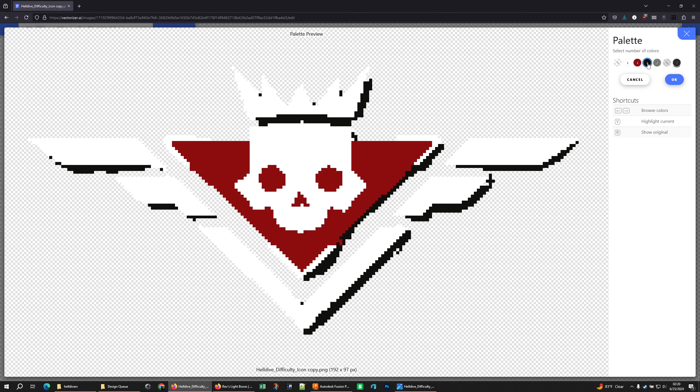So instead of having multiple layers that it tries to cut down, you have fewer layers. Your printer, let's say you have a Bambu X1/P1 series, you've got 16 shades to work with. You can use more advanced techniques like layer blending or different thicknesses for different lighting effects, all valid ways of doing this, but we're trying to go simple.

So I'm just going to tell it to use 4 colors: black, white, red, and transparent. You always have the first one as transparent. So we do that again, and now we don't have all those grays in here. That should make this a little bit easier to work with.

There are a couple of different recommended settings. Some people like to work with fill shapes, I don't — I'll explain why in a minute. I prefer to use stroke the edges between shapes. Off the default settings, I prefer to turn off the circular arcs and elliptical arcs. This is actually something Pete worked on with the folks at Vectorizer specifically for creating light boxes, and they said this will improve your experience. So my suggestions again: stroke the edges between shapes, turn off the two different arcs, and when you switch from fill shapes to stroke the edges, some other settings change, like you can no longer choose filling gaps. This is what I recommend.

So I'm going to grab this and just overwrite one of the ones I was playing with earlier, and jump into Fusion. In Fusion, I have a couple of recommendations for you.

First of all, create a template file — this will make your life so much easier. This one's mine, my Lightbox source. I'm just going to make a copy of it real quick. I'm going to rename that copy, because this is going to be the Helldivers box. Mark that as editable because I am not paying for Fusion — the free demo works fine for me.

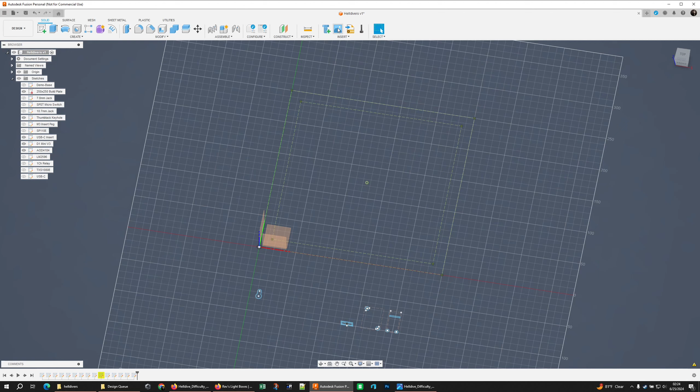So anyways, what can we do in Fusion? Well, there's a couple things. First of all, something I think a lot of people overlook is canvases. If you go to insert, canvas, or in my case I've got it pinned up here, canvases are super cool. So I'm going to start a new sketch real quick, and I'm going to add a canvas.

What the canvases let you do is you can take a raster image - oh, it's not going to go to the canvas, sorry about that - you can take that raster image, that JPEG, that PNG, that bitmap, whatever, and literally just drop it in as a background. You may be wondering, well, what's the purpose in that? What's the use in that? If nothing else, now I have a visual reference of what I'm recreating. But you can also use this for tracing, to recreate things just by drawing lines on top of them. It's a really cool little technique.

So I'm just going to drop this in here, and I'm not going to bother scaling it right now. I'm not really that worried about it, just kind of showing what it does. This is something that you don't really get to interact with. It's there, but you can't do anything with it.

Where you insert it in your timeline matters. I created my sketch before I did this, so now it's not going to show up. If I move that canvas back one, to where my sketch was created after this, now when I go in and edit my sketch, I can still see it. This is pretty cool because now I can come in here and draw my circles to try and recreate components of it or whatever I may need to do. Very, very useful thing, especially if you're recreating logos or things like that, where you want to have that visual reference, maybe for tracing dimensions of things or whatever.

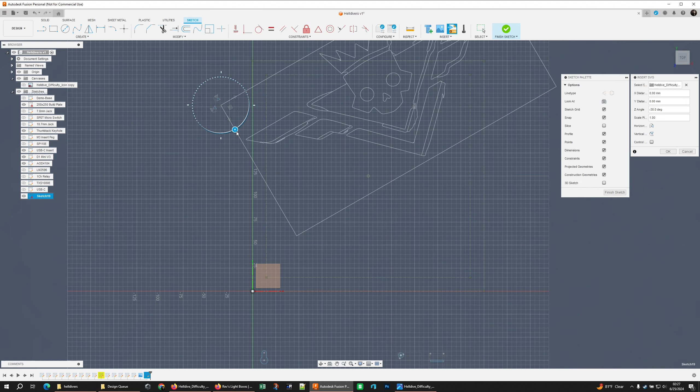What I'm going to do is just kind of scale this out first. Let's bring it up - I don't know, right about there maybe. It's probably too big, but that's fine. I guarantee that's too big. Let's rotate this 45 degrees, try and put that back in the middle. No, maybe it's not - I might have gotten that just right. So I've got my corners are inside of my safe zone. Actually, I scaled that perfectly. I don't know how I did that right the first time, but okay.

So now that I know this is the size that I want to work with, I'm going to go ahead and bring this back to square, level, or whatever you want to call it. Bring it across flat - we'll say flat. Fusion does not, in my experience, like working with things that are not XY level - I don't know what the word is. Still perfectly doable, but it's just easier when flat things are flat, I'll say it that way. I know those words are wrong, but I don't care.

So in my sketch still, first thing I'm going to do is just turn off constraints because I don't want them on. I'm going to get rid of this outside. This is ugly, this is not what I want to work with, but I'm using this as a template, basically. I'm going to work from this to recreate it by hand so I can get some really nice crisp lines, and then modify it past there.

First things first, I mentioned back in our Vectorizer settings why I'm using stroke the edges instead of fill shapes. One issue you'll have with fill shapes: let's say I don't want this piece right here. I can just double click this and get multiple lines all at once. If you're using fill shapes, that typically doesn't work. So that's one nice thing.

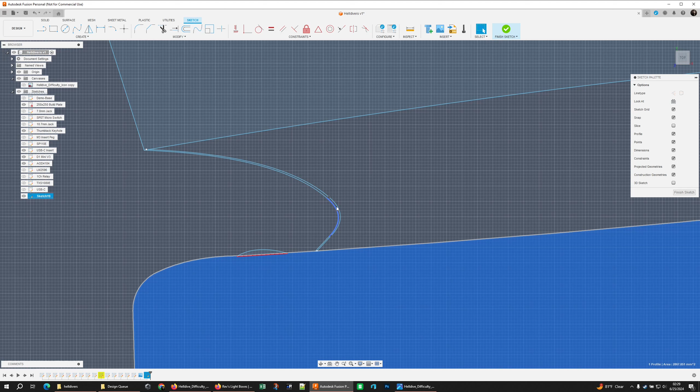The other part of it is duplicate lines, something we've seen in the community quite a bit. If I were to have a duplicate line like this - I'm exaggerating it here - usually it's a fraction of a millimeter difference, but it would still be there. If you zoom way, way in, as far as you can go, you'd see this tiny microscopic gap. When you go to extrude your shapes and you have this shape and this shape and this shape, that tiny little gap in the middle, while virtually invisible, can be enough in your slicer when you go to actually print this thing that it will put a little bit of distance between those elements.

Where that matters, like where the red of the eye and the white of the skull are, if it were to introduce that little tiny gap right along this edge, that could be just enough to where it has a weak bond, to where the white or red of the eye and the white of the skull don't bond together very well at this line, causing it to be weak and fall apart. I've seen that more times than I can count in community posts and forum posts, where people print their boxes and the faces fall apart. This is one of the reasons why. Another reason being not using an assembly, but we're not going to have that issue.

Again, this is part of why I like stroking the edge of shapes between shapes once, because what that instructs it to do when creating this SVG, instead of saying the eye is a shape and the skull is a shape and there needs to be a line for the skull and a line for the eye, and sometimes those lines don't perfectly line up, it tells it instead to just draw one line between the shapes.

That's what this does. So for this one, I've got a lot of cleanup I need to do. All of that, I don't want that. This weird shape it tried to draw because of the shading in the image, I don't want that. I'm going to have a lot of cleanup, but that's okay. I'll come through and double click a whole bunch of this to get rid of those unnecessary shading elements. I don't need that line - it's pretty much good enough there.

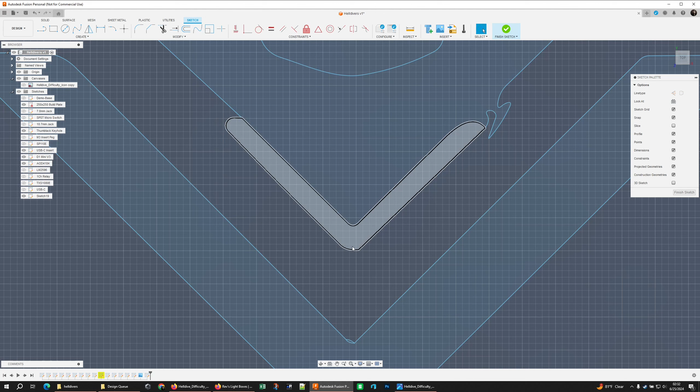Of course, I don't have a nice sharp point on this. We'll just move that - I want to make this a sharp point. I don't want this curve right here, so we'll delete that curve. Some of the cool tools you have to work with: trim and extend - I use these extensively. The extend tool works by extending things. The trim tool, shortcut being T, cuts off whatever it highlights red. So I've taken that round edge and now made it a sharp edge.

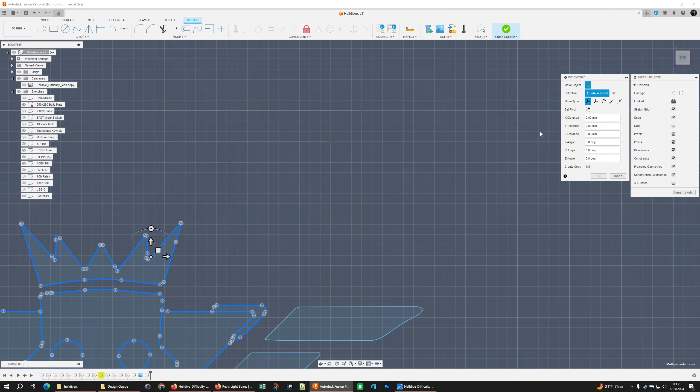Neat. I could do that all throughout this thing to try and put nice sharp edges all over it, but I'm not going to put that kind of time into it. If I come back in here and take my middle part, move you - I want point to position, grab my point, and move you over to 125.

125, not 12. There we go. So I've got one point in the middle, and another point in the middle. Looks like that's kind of lined my skull up. Cool, looks like this is starting to line up a little bit better. Kind of cleaning that shape up.

I'm not going to make you watch me do all of this because, again, this is just me wanting to create a very precise recreation of the original artwork. Basically I'm going to go through here and sharpen the rounded corners and make sure everything is nice and neat and even. Because this is an image that is mirrored, I'm going to focus on doing the left half of it, and then just mirror it over to the right. So I'm going to pause the video here, and if I come across anything really exciting along the way I'll unpause it, but basically it's just cleaning up the shape data.

Okay, so at this point I've got the image I want to work with. Basically what I did here, I went through and created all of the geometry on one side over here on the left, and then just created a mirror of it. Did that by drawing a center line - that's part of why I lined everything up at that 125 millimeter mark - and then telling it to mirror over. I had to connect a few extra things and whatnot, but I'm pretty happy with this.

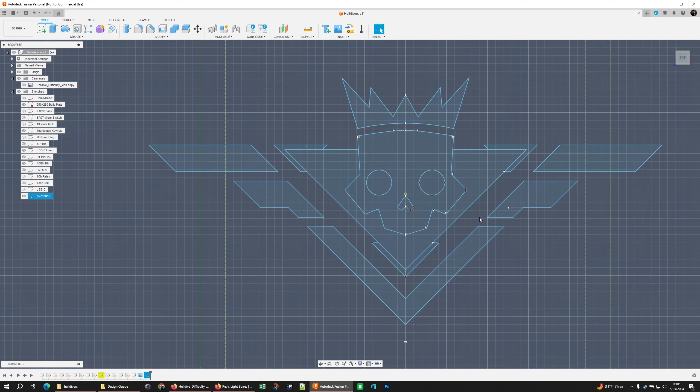And if I turn on my canvas, that's pretty darn close. I'm happy with that. Is it going to be absolutely perfect? Probably not, but again, I'm happy with it. Except for this - I need to fix this. I think that should come in, so let's edit that.

How do I want to fix that? Turn this off. So one of the cool little things you can use is the line type - construction lines are a lot of fun. Construction lines are these dotted lines, and they don't actually interfere with your geometry. For example, this is still one piece here, whereas if I made that a regular line, which you can toggle just by tapping X, now I have two different pieces. Construction lines are super useful if you're just trying to connect the dots, basically.

So yeah, I think what I want to do on that - I'm going to do this on both sides real quick. Draw another line over here as a construction line, and I'm going to turn those to solids, or to normal lines. Then I'm going to bring up my trim tool, knock out the middle, knock out that piece. Does that look right? Let's see if that looks right.

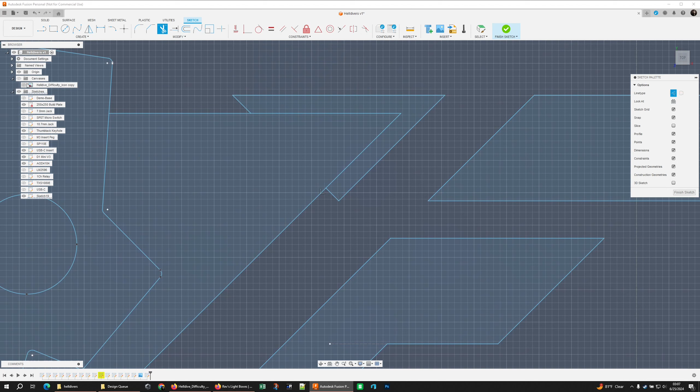You know, I don't think that's right. I really wish I had a higher quality image. Let's see if I can find a better image of this.

Helldivers difficulty image. See, they're always these tiny little pictures - it's the best you can find. That's the same washed out image, and that's even smaller. I think this is actually the one I was working with.

Okay, so those should be flat across, and it looks like maybe those are flat. Okay, so those are just 90s then - okay, we'll work with that. So basically undo what I had just done, and then bring this one down. I think that's what I need to do. So let's undo all of that. Okay, and...

That looks long, so what I'm going to do is just cut these off right here like that. Trim tool, knock that out, hit X to make that solid. Trim tool, get rid of that and that. Select that one, X to make it solid. I think that's about as accurate as that's going to get.

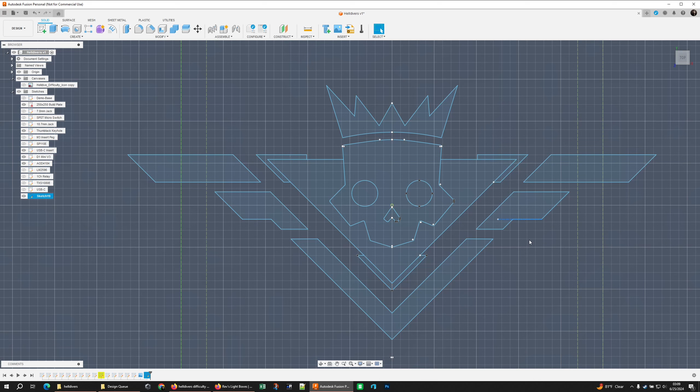So the trick from here - now that, let's say you have a clean SVG you're going to work with already, you don't have to do that cleanup work. What do you do to actually make this into something you can print, to make this into a functional light box? This is where offsets come in.

First thing I'm going to do, I'm going to draw some lines. I'm first going to name this artwork, just so I can keep track of my sketches. I'm going to edit my sketch, hit L for line, and I'm going to connect things. Basically, I want to fill in these voids in the middle. I want to make everything on the inside of this. Not quite.

If I touch this line down here, you see how I have those two little green parallel symbols that show up? If I come back over here, it'll snap to that parallel for me. Then when I drag it to where I get that little X to show I'm intersecting the line and I'm still parallel, I'm basically extending that line. So instead of using the extension tool, I just have another line that's parallel. It's actually one of your constraints up here to make this line stretch out.

I think what I'm going to do, in the interest of art, for this part up here, I'm going to use my inspect tool to find out how far this is. 2.807. That's unfortunate, I wish that was a more even number, but we can work with it.

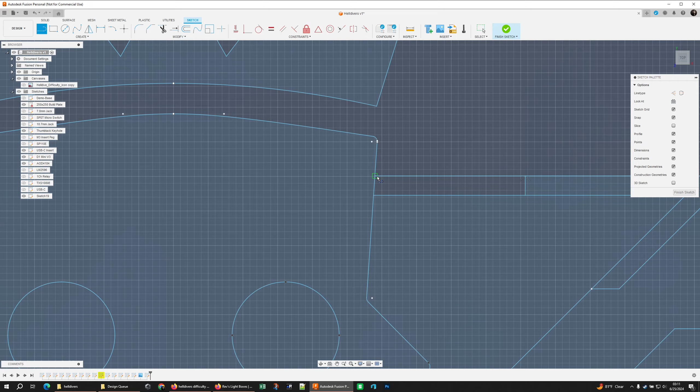I'm going to extend this line all the way over. Why did that not connect? I might have clicked on something I shouldn't have. Maybe I just need to extend it. Okay, and we'll trim off the extra. What probably happened is I clicked on this line right here instead of actually intersecting that one. So just extending it and trimming the extra off forced it through.

But then what I'm going to do, I'm going to grab all of these little pieces. I could double click, actually, you know what, I'm going to double click everything, it's easier. Double click. Come on, double click. Why am I bringing up move?

Okay, we'll just get all of it. I'm going to offset that. Couldn't offset, of course, that's fine, whatever. You and you. You let me select. Nope. 2.087, was it? Or 2.807? No, I forgot my distance.

I have this one over here already, it's a line, this little construction line. So I'm going to put that up there just so I can see it. And to make sure that doesn't influence anything, I'm going to toggle that as a driven number. Driven numbers, the ones that show up in gray, are basically just measurements. I can change this, and this number does not enforce the distance. If I have that as a driving number, I can change that, and it will change the distance between these. But a driven is basically just giving me that number.

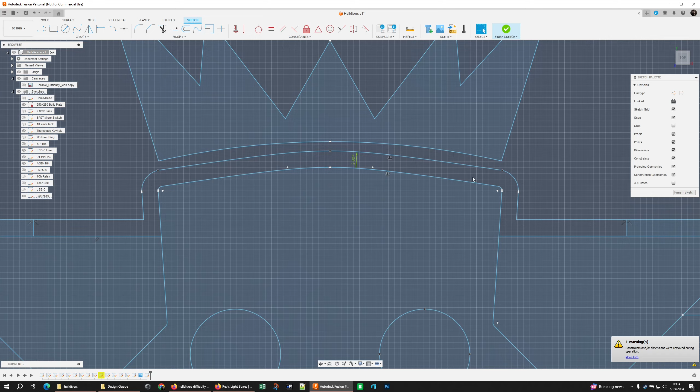I need to join these together because they are not joined together. You can see a lot of times people say, well, hey, why can't I select this shape here? What's wrong with it? Well, it's not a continuous line. In fact, oh, this is why I couldn't do my offsets earlier, this was done poorly by me. So I'm going to trim that, and that. Now that's a continuous line. Now I can actually do this.

I'm going to go back and fix this first real quick. I'm going to undo all of this. Right there, so I should have caught this earlier. This is an example of me doing this poorly. These lines do not work, it's not a continuous line from one to the other. There's an intersection there. So if I delete that part and delete that part, and if I would have done this before I did my mirror, it would be on both sides.

Delete that part and that part. Now, I should be able to select the whole thing. Nope, there's an issue here as well. And I'm zooming in so far, like all the way in. There might be something screwy here.

To fix that, an easy little way, I'm going to draw a circle, just a tiny little circle right here. Oh, my computer's getting mad. And delete those parts in the middle of it. And delete my circle, because I don't need it anymore. And then I'm just going to connect these two together.

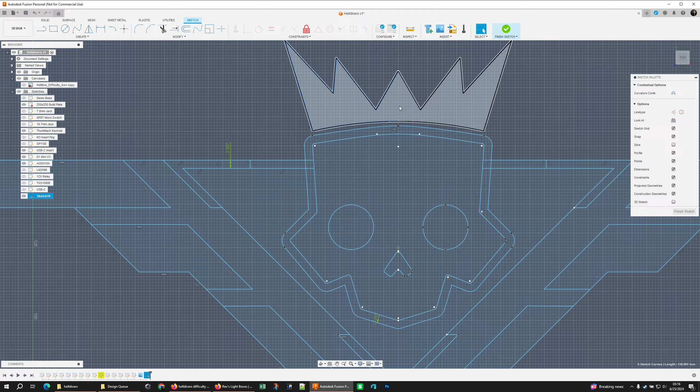And what about this one? Yep, this one's going to have the same thing. This is a result of me having mirrored it. Usually not something you'll run into, but resolving those little arc issues or whatever you might have where these lines don't perfectly match up. It's enough to be continuous for a shape, but not enough for a continuous line.

Again, just draw a little circle. And I want to say this was a Pete suggestion, so kudos to Pete again for that. Oh, you're not letting me cut it up, huh? My circle needs to be bigger, probably. Or can I extend it? Nope, I'm not going to mess with that, to be honest. I'm not that worried about it.

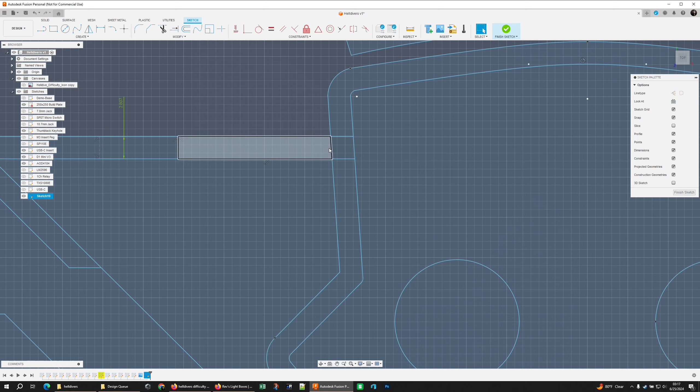Start getting some weird things if you mess with it. Anyways, I've got this line coming around, so what I want to do is make this one continuous shape. I'm going to trim out that and this one piece right here, then come over here and do the same. Clean out the inside and then the extra. Now I have all this junk on the bottom. I can double click it and delete it.

I don't need it, so I've got this little filler now. Great. The reason why I care about that, I want to try and replicate this line across here. This is just going to be black filler. I need to do more offsets. So I'm going to hit offset, re-enable chain selection, pick you.

Now we need to start thinking about how we really want to make this box. I do my offsets in a particular way. I like to do the face of my light box as the insert, and then have my walls attached to the base of my light box. To do that, I'm going to need a couple of different offsets. And the math I use for that, because I type math in here instead, is going to be multiples of wall widths. I'm thinking about the width of the lines that my printer is going to make.

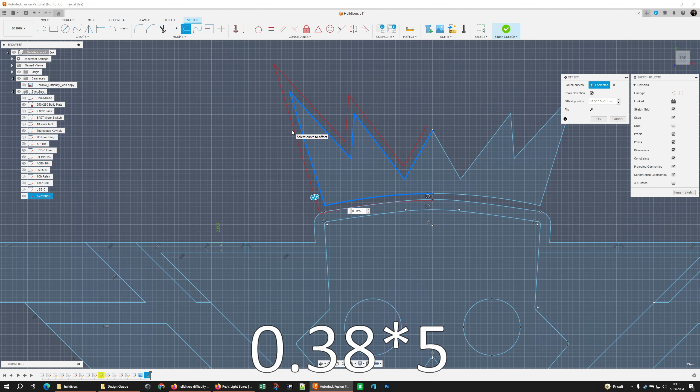In this case, I've done some playing around. 0.38 millimeters is what a standard 0.42 millimeter line actually prints at, and I want to do 5 of those. So that's going to be my first offset, 1.9 millimeters. I'm going to do it again, 0.38, but this time times 10.

So what I've got here is my actual artwork, an inner wall and an outer wall. And look at how big and rounded that has become, or how long and pointy that has become. We're going to shorten that up in a little bit.

I need to repeat this process on the other side. Offset U, 0.38 times 5. Now it's on the wrong side, so I'm just going to hit the home button and put a negative sign in front of there. Now it's going the right direction. Offset again, U, 0.38 times 10. Again, need to make it negative. And yes, I could type in negative 3.8, but I just, out of habit, do the math.

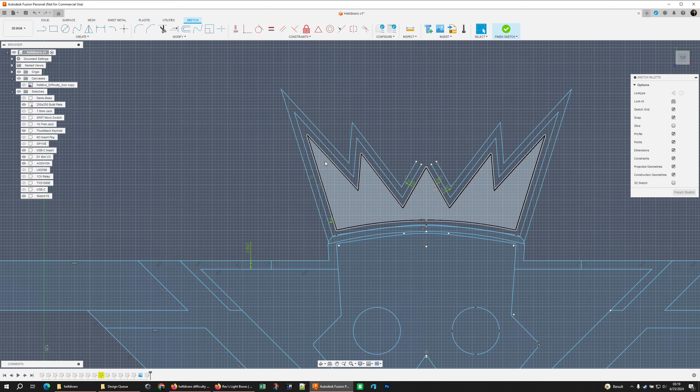Now we can keep these super sharp points, and for this part of it, it would actually fit, but I'm not going to gain anything out of this. Because when I go to extrude this, this is going to be, what, white or red or whatever color? White. And then I'm just going to have black and black. So these really don't need to be terribly huge, and we can shorten that up using our fillet tool.

First, I'm just going to extend this out, connect these together, make sure I get continuous lines, because when I come to extrude these, I'm going to need to be able to select this part and this part. Got a little bit more cleanup to do. Down here, I've got some overlap on these areas. Let's see here, how do I want to clean this up? So let's try to keep this part continuous.

I think that's what I'm going to do. I'm just going to offset from these. So this one, offset 0.38 times 5. And then do it again, offset this one, 0.38 times 10.

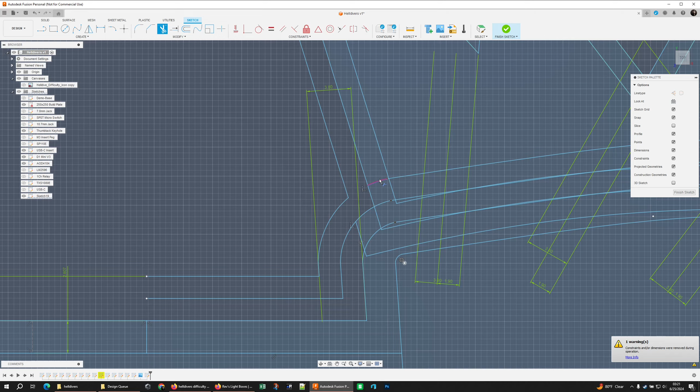Got all these extra lines everywhere, but that's what the trim tool's for. All I have to do is think about what line I'm working on. I'm going to hit T for my trim tool. I'm going to cut out this part and this part, because that's the line I want there. For this one, I'm going to trim out this part and that little nubbin, and this part and this part, and this one and this one.

Now I've got that line. On the inside of this, that doesn't matter, I'm just going to clean that up to the original. I need to clean up on the outside, that one and that one, that one, that one, that one, that one, and a little bitty bit right there and right there. So if these were connected, I would have my outer wall, my inner wall, and then this is all just

artwork filler. I'm going to delete all my extra lines. This is where double clicking comes in so handy. I can get rid of that.

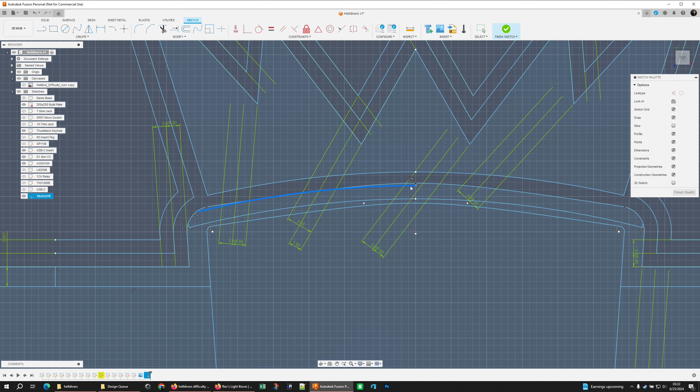Which one of these is my original? I think that is my offset line because it's broken, it's not extended all the way out. We'll get rid of it. I don't need that line. I don't need that line.

So now I have my artwork, my original right here and here. This is the filler just to kind of fill in that gap, which we won't even need. Do I need that? Yeah, I will need that. And we'll go ahead, I'll need to extend that. Yeah, I can extend that, and then I can delete this.

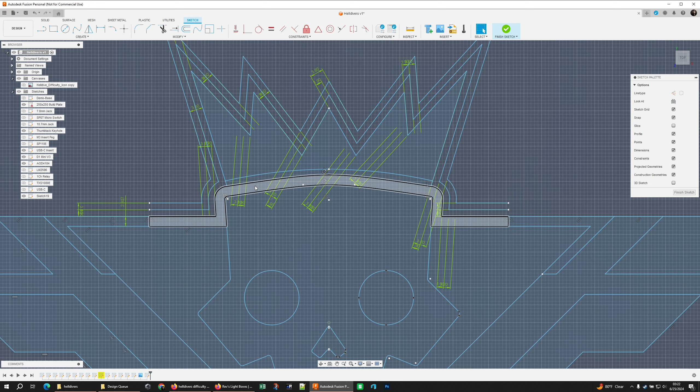I can trim that out. Trim there, and trim there.

Oh, come on, dimension line out of the way. What are you? This is just me being curious. What are you? Part of the arcs, maybe? I don't know what you are. Anyways.

Your offsets do have to be continuous lines, that's probably why it's angry. 0.38 times 5. Offset 0.38 times 10. I'm just going to repeat this process, the same thing I did on the crown. I'm going to take the shapes that I care about, offset them by those two metrics, 0.38 times 5 and 0.38 times 10.

I'm just going to repeat this for all of my outside shapes and connect them together. So I'm going to go ahead and pause again. Okay, so what I've done at this point, I just went through, did some extensions and trimming the same way I had been. I now have an outer band, an inner band, and then all the different artwork components.

What I need to do at this point, because I'm happy with the way all that looks, I want to round these corners off because I don't need this to be so long coming out here. Now, would that work? It absolutely would. And there's no reason you have to do this, but I'm perfectly content rounding these off a little bit.

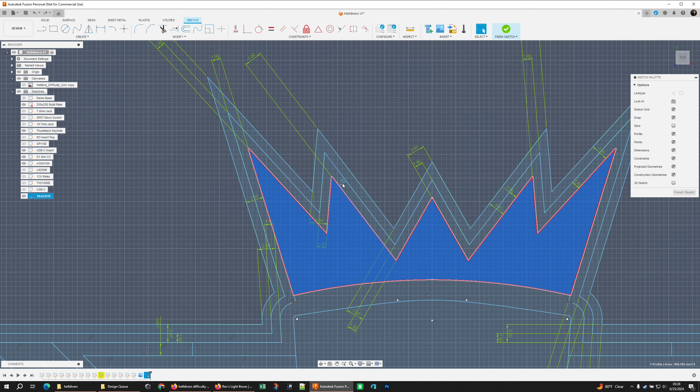To do that, I don't want to change this one, this is my artwork. And because I did all of my offsets the same distance, in this case the 0.38 times 5 and 0.38 times 10, which gives me the 1.9 and 3.8 millimeter offsets, I'm going to bring up my fillet tool, which is just a rounding tool.

I'm going to grab the first one. So this is my artwork, and then this is my first one. I'll select those two walls, and at first it's going to just come up with whatever number. Now I'm going to put in my 1.9.

Why am I doing that? Well, this is what I call a concentric radii, I think that's the proper term for it. That from this point, if I were to draw, in fact let me cancel this, if I were to create an arc and do a center point arc, from here, somewhere in here, I would find that 90 degrees, which is that 1.9, and then draw an arc over.

If I were to do this, I'm creating this in such a way that when my printer is drawing these lines, it prints one line up here, and then it creates that corner and comes back down. When it comes back to do that second wall, it's going to come down and be able to just arc over and come back down. I want to keep this the same so that when it's on the outside, it's five line widths over.

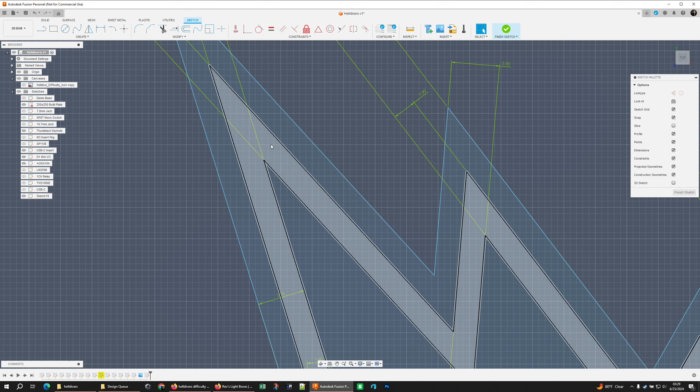Easiest way for me to do that is to use the fillet tool, take the center one, and tell it 1.9, because that's the distance of my offset. Do that. Now I'm going to bring that back up and do this on the other ones as well. Little trick, if you just type in the number and don't hit enter, but just come over and grab your next one, you can round it off just the same. So I can come through here and do all 5 of these and not have to type it over and over again. So that's the inside of it done.

Well, now I need to do the outside of it. So I'm going to bring up my fillet tool again, grab these 2 points, 3.8.

3.8. Then do the same thing to this one, and this one, and this one, and this one.

Now that rounds off the outside of this. This is not the part that's going to light up. When I have this lit up, this is going to be the part that actually glows. This is just the supporting walls that holds it all together. I don't care about trying to make the black plastic parts big and sharp.

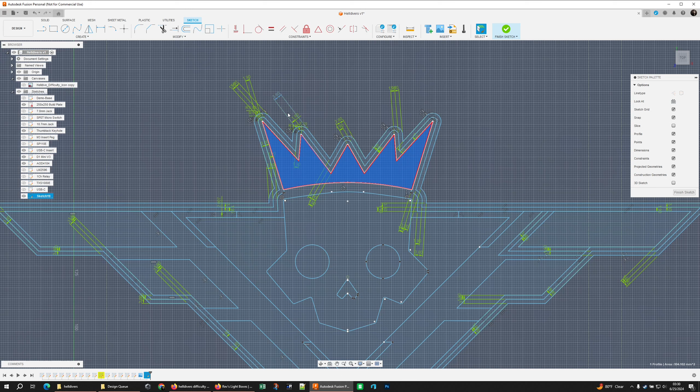This is going to save print time. This is going to make it easier to get lighting into here, because if I had those really long spikes, I wouldn't very easily be able to run my lighting through it. This is just going to make my life a lot easier. So with that, I think that's pretty much my sketch complete.

Part of what I wanted to double check, remember I had first scaled this to where this point to this point would fit inside my safe zone. Well, let me go in here and edit this real quick.

I select, oh, one thing that happens to me all the time with the select tool. By default, you have the window tool, which is 1, to draw your boxes to select things. You can also hit 2 to bring up the lasso tool, which can be useful in a number of cases. I think I used that earlier. I have a bad habit of hitting numbers when I don't mean to and accidentally bringing up this tool when it's not the one I want. Hitting 1 takes me back to using the rectangle tool.

I hit M to bring up move, and I'm going to choose this set pivot point. I'm going to pick just like the middle of the nose here, like that point. Confirm it, click the little checkbox, and now I can rotate this entire thing on that axis.

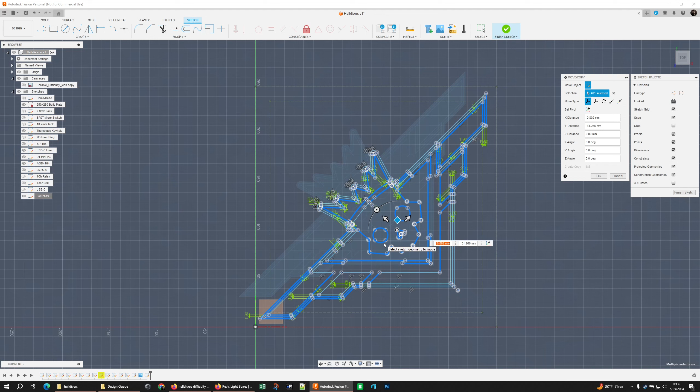Why I want to do this - if I rotate this 45 degrees and then move it, does it still fit on my printer? Yes it does. Looks like I've got about 5 to 10 millimeters on each side to spare. So it's not absolutely as big as I can print it, but it's pretty darn close, and I'm okay with that. So I'm going to cancel that move.

So at this point, we've got our artwork completed, and I don't need my bounding box. I'm going to start doing my extrusions.

I lost my name again because I changed it when I was editing it. Art - there we go. If you change the name while you're editing the sketch, it loses that. Or I undid something at some point and it lost it. Anyways, for our extrusions, I'm going to start by grabbing my outside wall, this piece.

Hit E to bring up extrusion. I'm going to say that I want this one to start as an offset 40 millimeters high, and I'm going to bring this one down by 2. I work from top down. You can do this however you want, this is just how I've always done it.

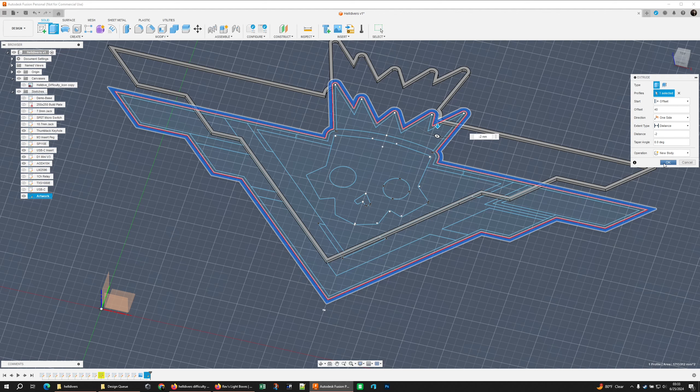It's my method. A lot of people do this on different planes, like doing this on the YZ plane or whatever. This is just how I do it. Basically what I'm doing is starting with where the top of my box is at 40 millimeters high, and then I'm going to work down. So I want my outer lip to be 2 millimeters thick.

Cool, turn my sketch back on. I'm going to next grab the piece inside of there. Now this one I'm going to extrude, and this time I'm going to choose from object. Basically everything I do is going to be from object for the remainder of this project. Only the very first extrusion is going to be done with a distance from the plane.

With that, I now have to choose my object. I'm going to choose the face on the very top here. I'm going to do this over and over and over again. This I want to extrude 5 millimeters down. It's going to be a join operation, and what this is going to give me is an outer and inner lip. This is what I'm going to be working with for my box.

Join that together. This is all black so far. So if I look at it from the top down, I've got my 2 outer walls. None of this is artwork.

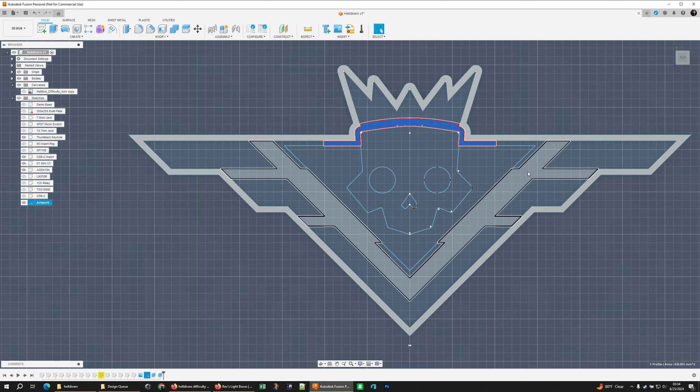This is just box work, if you will. Oops, I forgot to clean this up. I don't need that or that. There we go. So now I'm going to grab the remainder of what would be black, this piece in the middle and this piece right here.

I'm going to extrude those from object, select this guy, negative 0.6. I don't need this thick. Three layers is enough to block light when you're working with an opaque black. Sometimes it needs to be more if you're working with a less opaque black. There are such filaments on the market.

I've never had a problem with 0.6. The remainder of my face is going to be 0.6, but this is all going to be black material. So there's that part. If I turn my sketch back on, now I've got my white and my red. That's all I need to do.

So at this point, it's probably a good time to go ahead and start making components out of things. So I'm going to take my body here, and I could have done this in the very beginning with my very first extrusion. I think I can't change it. No, I can't change it. When you're doing an extrusion, you have the option—oops, wrong button—you have an option to create a new component instead of a body, and I should have done that on my very first one.

I didn't, so I'll correct that now by turning this body into a component. Create component from bodies. It's now down here as a component. I'm going to change this to be called face, because that's what this is. This is my face, and inside of here I've got Body 1. This is lip black, because it's the lip of my print, and it's black.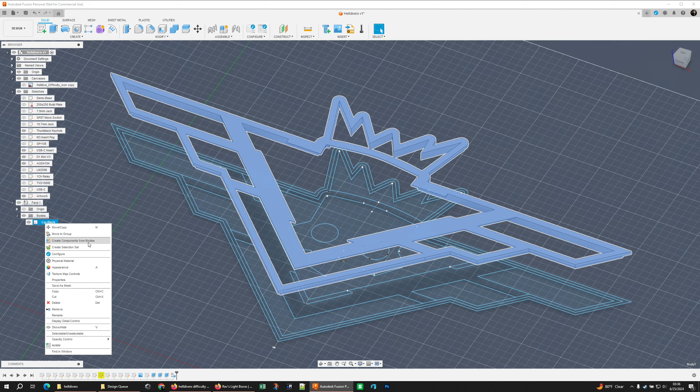And now I'm going to create a component from that. I'm going to put a component in a component. The reason being is when I export this, I will have my face file. I'm going to use this as a step, and then inside of that I'll have an object listed that's visible to Studio called lip black. It'll make it super easy for me to go, oh, that needs to be black.

So moving on, let's grab our white components, which would be all of these things right here, here, and here. Those should be all my white things. I'm going to extrude those, same as before. I'm going to come down and say from object, that object, and I'm just going to leave these as bodies. That's actually fine.

Leave these new bodies, negative 0.6. It still says new body. It didn't switch to join, which is good. And why are you not letting me do that? What did I mess up on? Oh, I did that as an offset instead of an actual extrusion distance. My bad. Negative 0.6. Now it says join, new body.

And I'm doing these as bodies because I already have my component. So we'll create those. Now I have all these extra bodies right here, all these different things that I just extruded.

A little trick you can do, not that it's necessarily terribly viable at this point—you can select multiple things over here just holding shift. You can click on one of them and name it like face white if you want, and since I have them all selected, it will rename all of them. You can also use the F2 button on your keyboard to do the same thing.

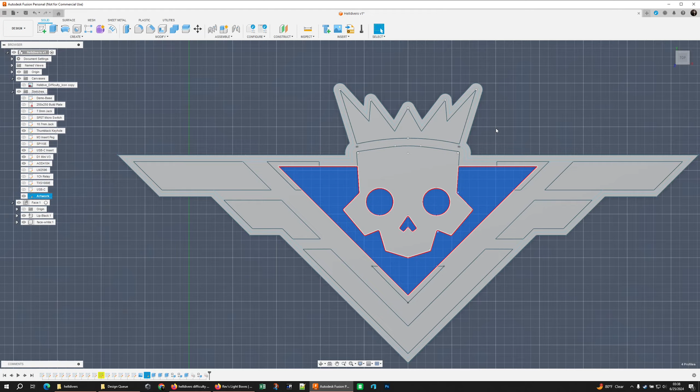Oops, wrong button. Which is that part, that part, that part, and that part. So we'll extrude those from object—again, I'm selecting my face, that face lip that I made, because that's kind of like my master. I'm going to tell it my distance is -0.6, as with all the others, and new bodies.

Same process as before: face red. Drag these down to my face. Create component, and then put all of my reds with my reds.

Now, here's part of what makes this cool. If I turn off my sketches, I've already got my library of colors loaded. I hit A to bring up appearance. I've got most of my plastics in here. For lip black, I can literally just grab my black, drag it over to that piece, and now those are black. For my white, I want to find that one—white—and my red, red.

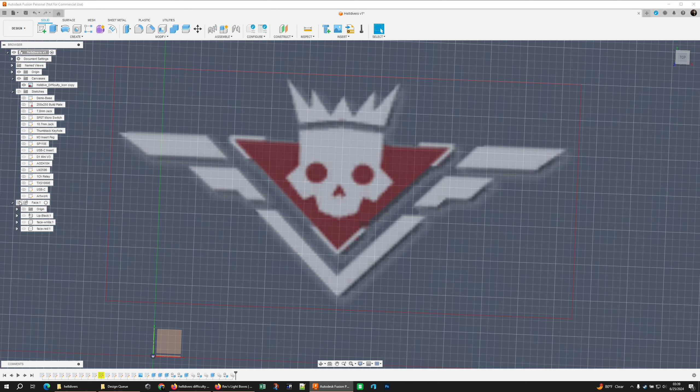And that's that. I now have a colorized version of my object. If I turn off my component, looks like I colored everything correctly. I'm happy with that. So we'll turn the canvas back off. This is my face component. That's it, it's done. There's not anything else I need to do to it.

Now I'm going to make the base. I'm going to turn my artwork back on. Oops, turn sketches back on altogether. I need to start with this piece.

Okay, so I'm going to grab this outside part here, and what I want to do is extrude it off of this. So I'm going to hit E for extrude again, and from object, I'm going to select that plane right there, that face, the underside of this, and I'm going to bring this down. I've already brought my face down by 2. I want to bring this down by a total of 5, so this needs to come down by 3, -3. Basically this completes that face, but this is going to be a new component, as I want this to be separate.

Yeah, so that's there now. Let me pull this up. This is going to be base. This is the base of my face, or the base of my box.

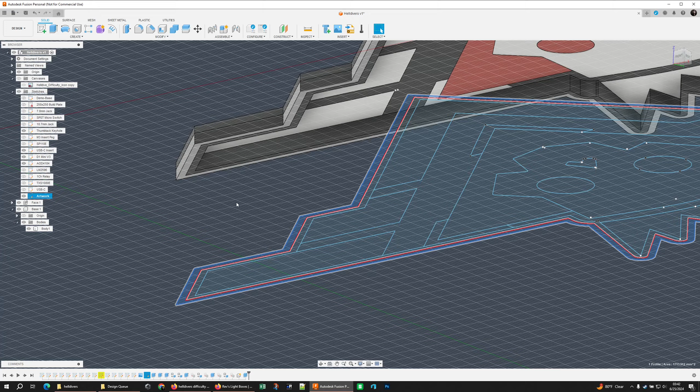And I'll do the other extrusions, then convert these over to subcomponents. From here, I need to do this a few more times. I like putting in a decorative bias strip. Again, this is just the process I follow. If you want to skip this step, you are more than welcome to, and you would have extruded this one all the way down to the bottom.

But what I'm going to do is do another one from here, -10, as new body. Okie dokie. Then, oh well, it didn't put it in the component, but whatever, it's fine. Then I'm going to extrude this one all the way up to there as new body. So now I have this part, and this part.

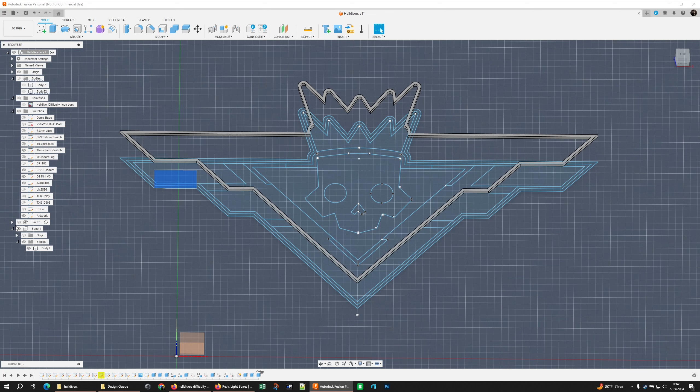I'm going to turn my face off because I don't need to see that. And I'm going to turn all of my bodies off. Oops, turn my base off too. Grab everything, and I'm going to extrude this up by 0.28 because I'm going to print my base at a 0.28 millimeter height, times 8. 8 sounds like a good number to me. Turn my bodies back on.

I want this to join, not cut, so I will join it and click OK. So now I have 3 bodies, and I'm going to go ahead and drag these down into my base. Turn that back on.

There we go, I don't know why it didn't display them, but whatever. So I've got my base lip. I've got my base accent. And I've got my base black, because, well, it's black. Those need to become subcomponents, so they are named, so just convert them to components. And now I can name them, or color them. You can do this by dragging directly to the objects if you want. Just make sure you don't drag to your sketches, because that messes with everything. That's what this is. Don't do that.

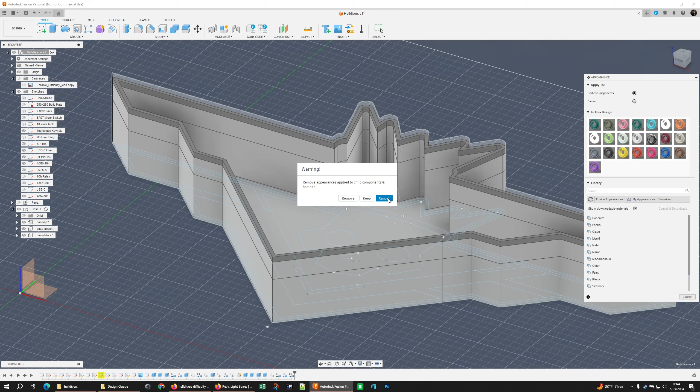So I'm going to go back to here, and my glow in the dark. And this is just, again, the way I've liked to build these forever, because, well, it is. So now I have my face and my base.

On the face of my plates, or the face of my boxes, I like to add a quick chamfer to them, so we'll bring that up. And are you going to make me click every line? You are. Sometimes it'll select everything, it'll select multiple lines for you, but not in this case. I'm going to have to do them all individually.

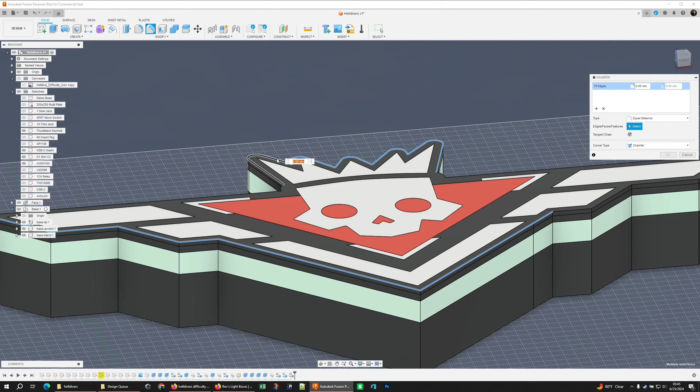In my view settings, I have click through turned on to where you can click on things you can't see. Sometimes that's useful, sometimes it's not. In this case, it's not being terribly useful, but whatever. Clicky, clicky, clicky, clicky, clicky. That should be... oh, no. There we go, that should be my entire perimeter.

I knocked that down by 1. Yay! That little 1mm chamfer, I just like the way that cleans this up a little bit for me. I think it makes a difference. So, that's what I've got so far. Look at it as a render.

Looks pretty clean to me. I think that's a pretty accurate representation of the Helldivers difficulty icon.

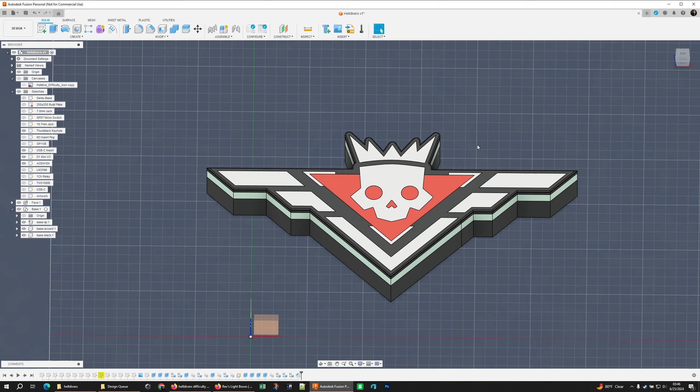So, a few more things to do from here. Right now, this is just an empty box, and for a lot of folks, this is pretty much where the design process ends. They'll print this, glue it together, drill a hole in the side, and stick their strip in it, and they're happy with that. Not me.

So I need to look at this. In my artwork, I want to create a new sketch. I'll turn my components off because I don't need them. I don't really need to project anything here because I can see everything I need. I was thinking about doing projections, but I really don't need to do any projections for this.

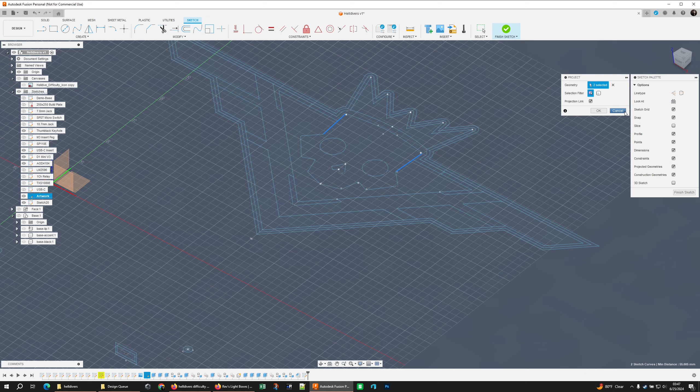Projections are super, super cool things. I'll bring it up real quick. If you hit P for projection, you can bring up either other sketches or edges, faces, whatever, on different objects. It's a really super cool way to project the geometry of something into a new sketch so you can work on it from there. In this case, I've taken those 2 lines, and if I turn off my artwork, I still have those 2 lines to work with. It's dynamic, it updates with things.

It's a really, really cool thing, but I really don't need it for this one. So I'm just going to undo that sketch, I don't need it. I'm going to keep undoing until I get rid of sketch 20. There we go. Okay, let's turn my components back off.

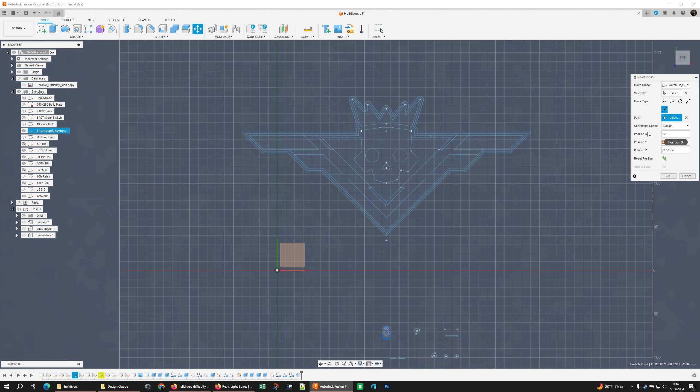I want to be able to see this because I want to move these. This guy, I'm going to move point to position. I'm going to choose that point and move it to X 125 and Y... 160. That's going to be a keyhole that I punch through to hang this on, and I think that's a good place for it.

Now I need to deal with these 2 guys. This is going to be where I mount my D1 Mini and where I mount my AOD, which is my PWM controller.

Where do I want to put them? I'm just going to hit move, and drag them just up. Am I going to worry about absolutely dead centering these? Probably not. I think I'm just going to get them where there's room and drop them there, because I could put them off to one side, which might be advantageous. But turn them sideways? No. This is a fairly small volume light. I think it's fine if I just kind of line them up a little bit, good enough.

One of the jokes I use - I'm not building rockets for NASA. Close enough is good enough.

The last one, my USB-C plug, it's going to have to go off on one side. That's a bummer, because that always makes things hang kind of funny. I'll use a 90-degree cord on this.

Anyways, this one, I'm going to turn my base back on, and I'm going to grab this. And I know just because I drew this line that it is at a 45-degree angle, or 135, however you want to look at it.

So I'm going to take this and hit M for move, and set my pivot to one of these center points, and confirm it. We're going to move you 45 degrees this way. Okie dokie. Now I'm going to grab it, point to point. Select this bottom one, and put you in the middle there. I think that'll be fine.

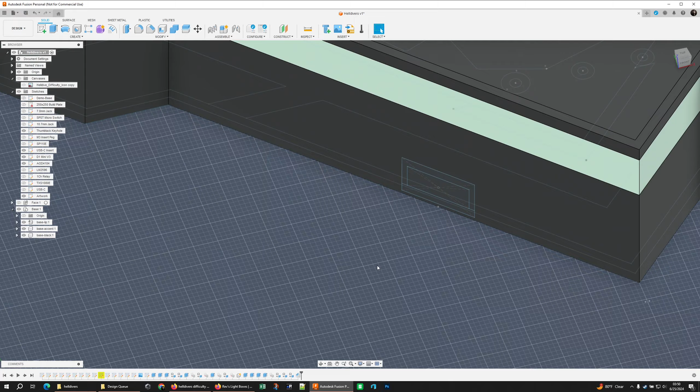Now, I've specifically made this little sketch to be able to do that, where I can take this point and snap it to bottom geometry and everything lines up. Again, this is part of why I suggest using these template files. Otherwise, if you aren't doing that, you'd have to come through and create your own sketch that has all of the right dimensions in it for the holes you're going to punch through and things like that. I think that satisfies where I need to put things.

So I'm going to come through and do a couple of others. I'm going to extrude this and pull it all the way through.

That's my keyhole. That will let me hang this on a nail or a thumbtack. I need to bring up these little holes right here. So I'm going to come in on these and grab you, and you, and you, and you, and you.

I'm going to extrude and say from... do I want to do this here? Yes, I want to do this here. From object, and select this face and bring that up. See, here we got 2.8. Let's bring that up 3 millimeters. Let that be a join operation. Are those floating? Are they joining? No, they're joining. Good, okay.

Completely unnecessary and probably doesn't help at all, but what I'll do is come in and do another fillet on these. I always want to say fillet, but I get in trouble when I say fillet. I'm going to select these parts of it, and we'll do that.

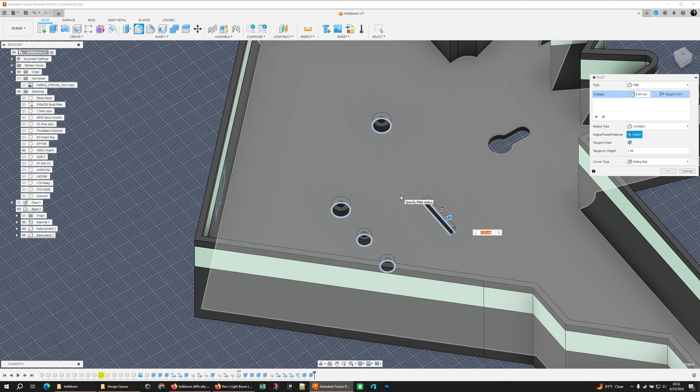Oh, I should have measured first. I need to measure. From this face to this face, I've got 3 millimeters exactly. Of course, because I just extruded 3 millimeters.

So, fillet, you, and you. By 3. Except I want to make that a little bit steeper. Yeah, that'll be fine. Again, the fillet probably doesn't help any at all from a strength perspective, but it gives me a warm, fuzzy feeling, so I do it.

And now I need to come down here. I need to cut this one all the way through. I have learned from experience with my USB-C snap-ins that they don't like the walls to be thicker than 1.5 millimeters. That's what this part is for.

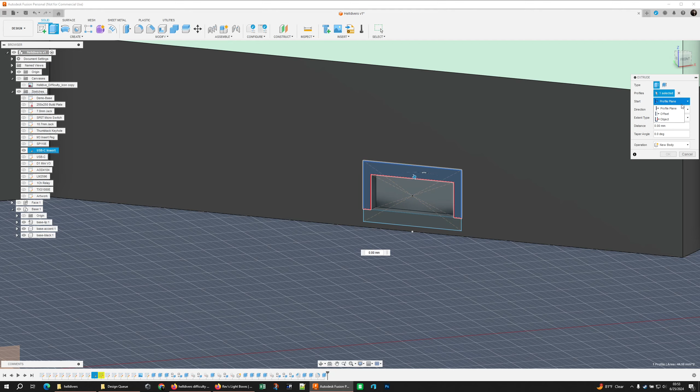I'm going to extrude you again. I'm going to do you, let's see here, offset 1.5 millimeters, and then just pull it forward. What that's going to do is cut out any part of that that's a little bit extra, leaving me with a wall that is from here to here, 1.5 millimeters thick. So that way the little arms that actually snap in will grab properly without getting misfigured.

And then just because I can, I'm going to grab that line right there, which you kind of lose here — you can't really see it that well. And it's probably going to be, well, let's measure the distance. In fact, you know what? I want to see that line. Here's another nifty little trick.

I'm going to bring up inspection and go to section analysis. Choose that plane and drag it over to 125 just so it's right in the middle. And now I can see in the middle of my print. That's a fun little trick.

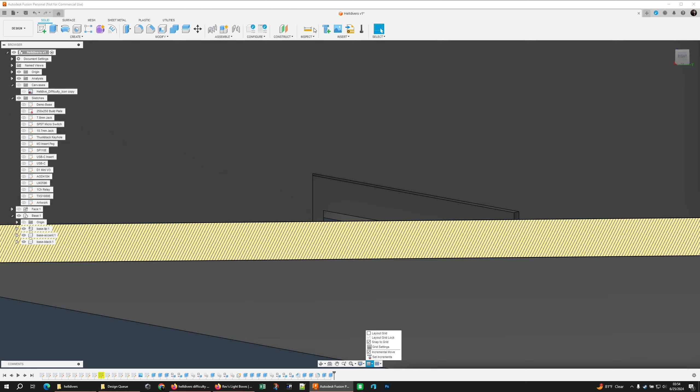Because what I want to do from here, I want to chamfer this that distance. So inspect from that plane to that plane is 0.4. Chamfer, that line, 0.4. There. So now that just isn't an overhang. I don't like overhangs. So that's done.

What else do we need to do? Let me turn my analysis off. A nifty little trick you can use that I didn't on this one because it's symmetrical.

If you want to find your center of mass, turn on all of your plastic, everything you're going to be extruding. Highlight all of it. So in this case, my two components. And then inspect and bring up center of mass. Tell it okay.

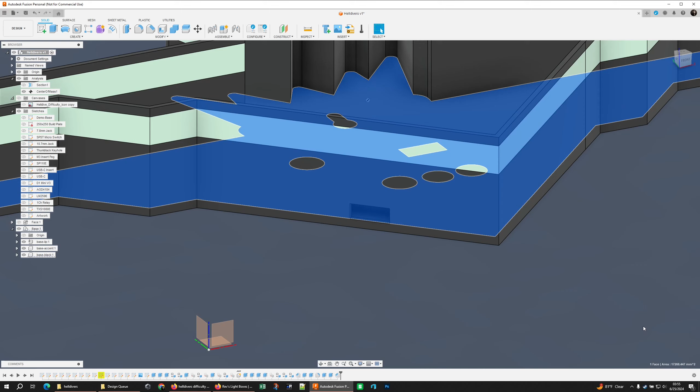What that's going to give you in your analysis now, you have a marker for center of mass. If I turn off my components so I can see it, I've got this one little mark right here. And if I highlight it — which it's not letting me for some reason, why can't I highlight it? There we go. Nope, okay, well, click it there. By clicking over here, I can see it's at 125 and a tiny bit off, and 125 and a little bit off. If I look at it from the top, this is by weight the dead center of my print.

Now it's off a tiny bit because I've added these components to it and cut that hole in it. But 125 is basically where it needs to be because I centered this around 125. If this was a weird or oblong shape, or bigger on one end, you can use this to figure out what vertical line you need to put your hole in so it will hang properly off of whatever thing you want to hang it off of. Again, I don't need it on this one because I know I've made a symmetrical model, but if you're making an asymmetric model, the center of mass tool is super cool.

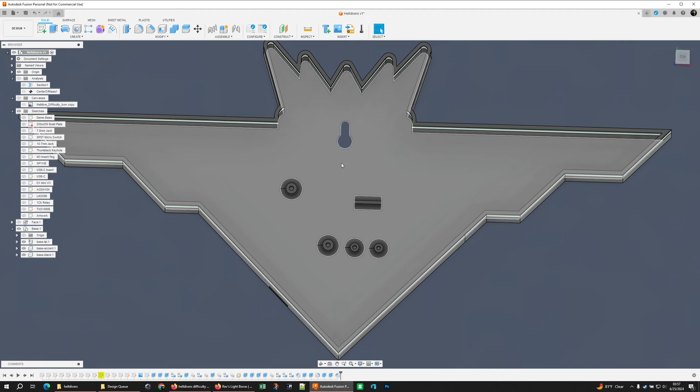Don't need that anymore. Let's see here. So I've got my face, I've got my base. I need to put my reflective layer in. So part of what I did earlier, I went through and did all these extrusions first. This is going to be where my D1 Mini mounts. This is going to be where my PWM driver mounts. I've got my keyhole. I've got my USB plug over here.

I want this face to be reflective, because that will help bounce light around and prevent a dead zone in the middle. For one that's this shape, it's not really necessary for your big round or big rectangular boxes.

It's much more useful, but the easiest way to do that—remember, I'm going to print my base, this entire thing, at 0.28 millimeters. So I'm going to select that face, hit extrude, minus 0.28 times 2, to take away 2 layer heights from that face. I'm going to cut that out. And you can see if I zoom way in here, now I have this little lip around things.

That's exactly what I want, because I'm going to print that face in silk silver, and I don't want other plastic joining on top of that silk. Silk is known for having weak layer adhesion. So I put in my extra elevated bits, cut away the extra, and now I'm going to re-extrude it 0.28 times 2 as a new body this time.

Drag that down into my base. I'm going to name that base reflector, and I'm going to create that as a component.

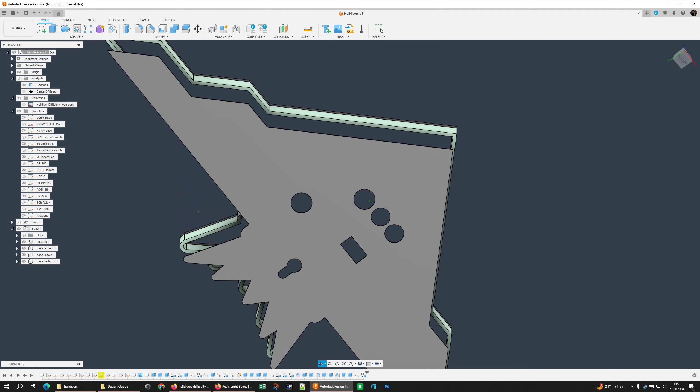Now what I have here, if I turn that base itself off—which is base black—I have just that 2-layer thick little line, or layer. And that will give me an addressable component in the slicer to say this is a different material, and it will print with different properties.

It also gives me the option to come in here and make that a light source for my renders. So if I were to render this, that's going to be a bright glowing light, which will work great to see how this looks with light projecting through my face. So it serves multiple purposes—not only is it more useful in the slicing engine, it's more useful when creating your renders too. No reason to let this sit here and churn through the cycles.

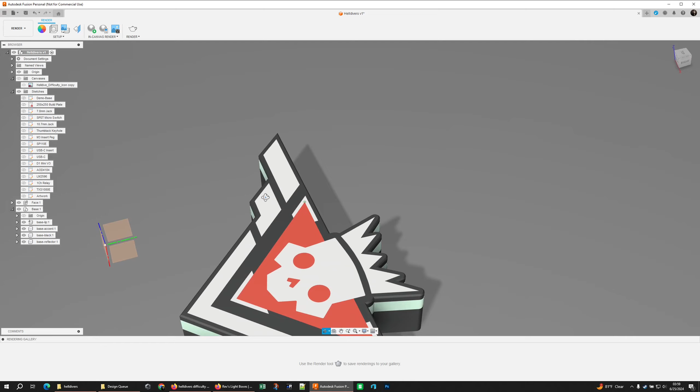But at this point, that's basically it. There's a few things I want to clean up just for my own sanity, my own quality of life. I'm going to come in here and turn off the face in my base. Let's get back to design.

Where I have these internal angles like this—you know, I probably should have done this before I did the reflector layer. Yeah, I probably should have. What I like to do is round these off using the fillet tool. Yeah, I need to do this before I do the reflective layer.

So: body, component, extrude—this is where I cut it, that's where I extrude it. So I'm going to roll back to here. And this is another little Fusion thing: use your timeline. If you make mistakes, if you want to change things, you can scroll back or just edit them.

So like where I did the chamfer right here on this component—if I wanted to change that angle, or not do that at all, I can edit it and change how I did that. Like, instead of 0.4 I could make it 0.2. I can change that, or I can just suppress it altogether without deleting it. It's still available to me; I can just make it as though it didn't happen.

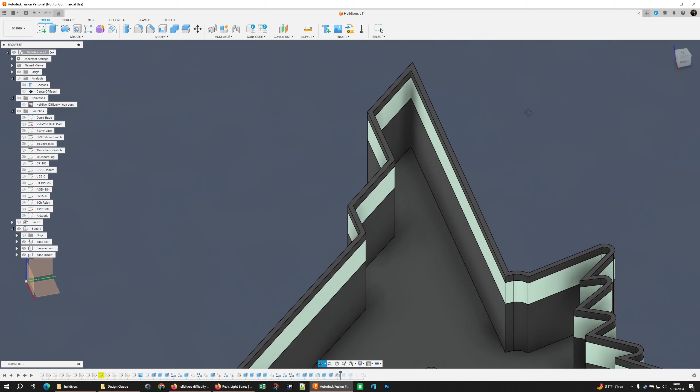Super, super powerful. So in this case, I screwed up—I wanted to round these corners off before I dropped and rebuilt my inside piece for my reflector layer. So I'm going to come back and do that by scrolling back in my timeline, and now I'm going to do some fillets.

I'm just going to do the inside angles primarily. Well, here's the thing—by doing this, I'm going to make this no longer print as nice. Maybe I don't want to. I'll show you what I mean real quick.

Let's just grab a couple of these angles on one side. I'll grab those, and those, and those two—let's do that by 2. No, 2's a lot, let's do it by 1. That's going to need to be different for these two if I was going to do this: 2 on those, and then we'll add this one and this one with 1.

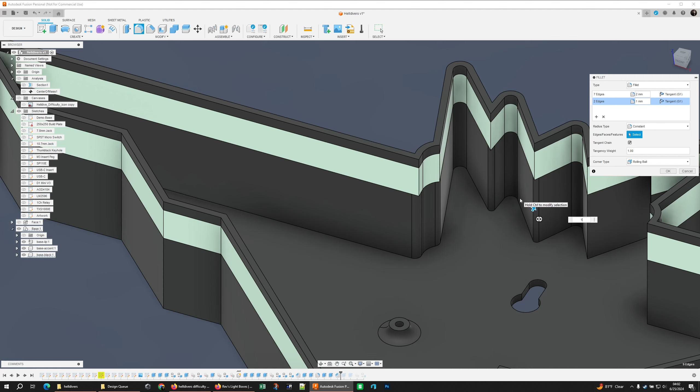Just to round those off so they're not sharp, hard edges. The idea is that when I go to stick my LED strips on here, having these rounded edges will make that easier, because I won't be able to stuff them all the way into a hard, sharp corner—the rounded edge will work better. Same on the inverse: when I wrap it around this hard corner, having it nice and round will be easier to work with.

But I just created a problem. Let me export this.

If I open this up in Studio, I'll show you where this becomes a problem. It's only a problem if you don't do it on both sides, but I don't want to change the outside geometry of this print.

So let's rotate this so it fits. I'm going to have to rotate it the other way because of the no-no zone. Okay, so now we've got this here. I'm just going to slice it. We don't really care about colorization or anything.

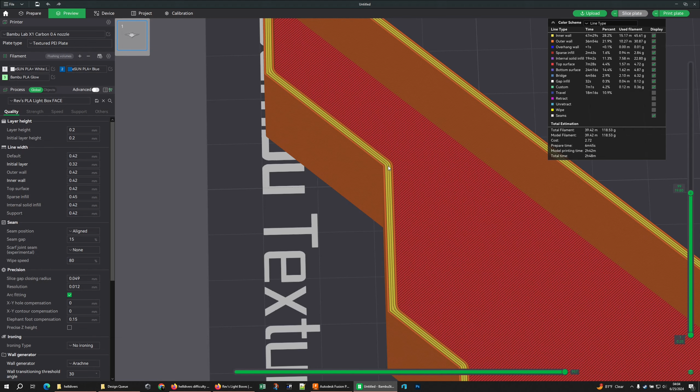If I look at it from here and zoom in, when I round it off here, it's going to be okay with that. This is a minor enough change on these corners that it's not going to freak out. In fact, I think it actually improved it right here. Let's compare the other side.

No, didn't really make a change there. It's a small enough change that it can adjust for this, so I'm okay leaving that in. You see where that got a little bit thicker right here? If that got any more thickness to it, it might become a second line that it has to draw in there.

But then over here, I made this a great big solid corner, so it's going to have to put a whole bunch of extra material into that spot. I don't really want that. Part of why I don't want that is the travel time.

If I turn my travel lines on, look at all the extra travel that this is generating to bounce back and forth to be able to fill this in after it does its walls, as compared to over here. Zoom that out a little bit. You've got all this extra travel being generated here.

If you compare that up here too, this is okay. It actually didn't generate any extra travel here. There's a little bit in there. Okay. Might actually be cleaner this way because I don't have that internal void.

So it's worth doing on, we'll call them, the obtuse angles, the inside angles. Looks like it worked out pretty decently over here too. But then on those really acute angles like this one, it's adding that internal space, and it's going to add a lot of travel time. We've got 18 minutes, 16 seconds worth of travel on this.

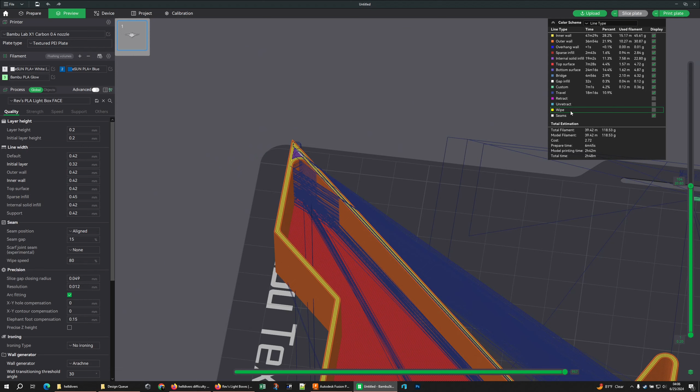If I come back and suppress my fillet, suppress my fillet, let me re-export this. Replace it, yes. So again, 18 minutes, 16 seconds worth of travel. And let me reload that.

Now we have the sharp corners all along. This is without our fillets. Slice it again. So only 1 minute difference, and I think that's because we don't have all the extra travel time here, but we added travel time elsewhere. Yeah, by not having these rounded off, it looks like we added a little bit here.

So it's worth rounding these off. It's not worth rounding this one off. I wouldn't do that one.

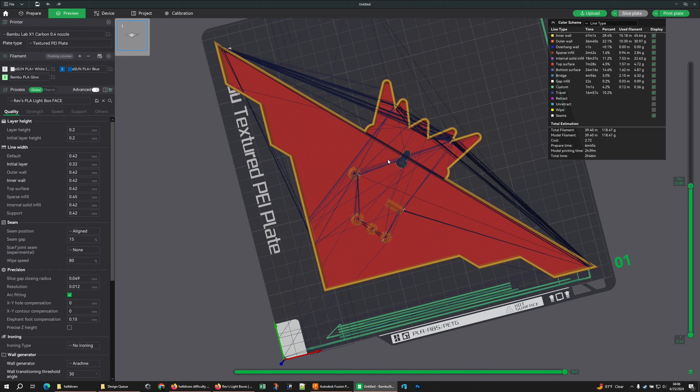Okay, so this is one of the things I like to do. I like to come in and frequently open this up in the slicer to see what it's going to look like. If there's something I need to change, like in this case, the fillet that I want to turn back on, I'm going to edit that.

As far as the ones that include the fillet, as much as I want to do that one, I'm not going to do that one. Because that was just... or maybe, you know what, maybe if I add that one as just a little bit. No, there's no reason to do that.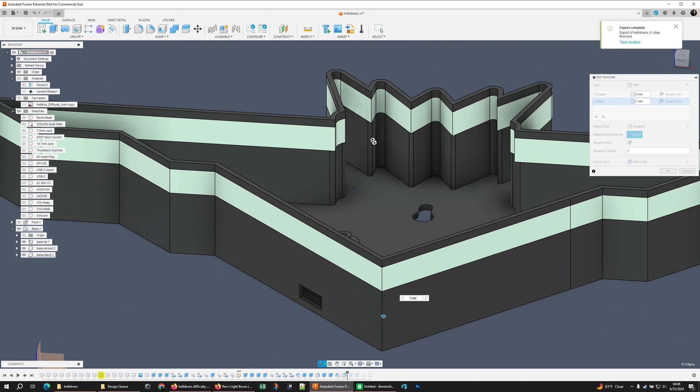And I really want to add some to that. Let's throw the 1 millimeter on that, just a little bit, to make that easier to get the LED strips stuck on them. That's really all I care about, because when I put the lights in here, I'm going to put them right against the bottom of this translucent strip.

And having that rounded off, this is actually going to save us time here. And I'm going to... do I want to do the whole thing? Actually, I really do. I really want to do the whole thing up on the top here, because making these contiguous, I'll show you what I mean in just a second.

Making those contiguous is going to make those look a lot better, especially because that's going to be in a translucent material. This green strip here is going to be glow-in-the-dark, and that glow-in-the-dark really looks better when it's just printed straight through. So we'll select those as well.

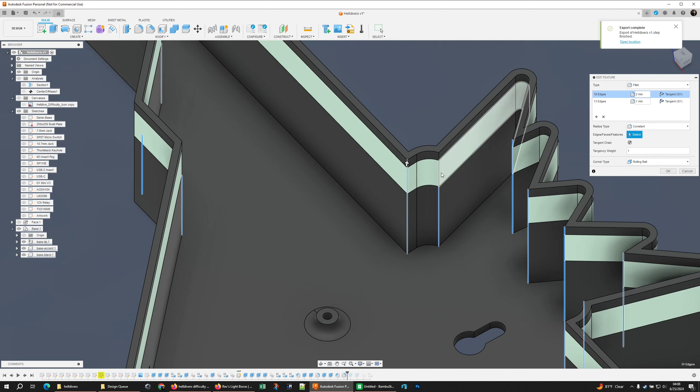Oh, it's getting mad at me. Okay, so before it crashes, we'll go ahead and save. We'll export this again. Export, yes, replace, reload.

From 18 something to 16 something to 17 something. We added some travel somewhere. Where did we add some travel? Probably that little gap in the middle.

Yeah, because if we actually look at the way this prints, it's a perfect example right there. It's going to have to draw these little inner bits first before it comes along to do the continuous lines all the way around it, and then it's going to have to break in the middle to go between those.

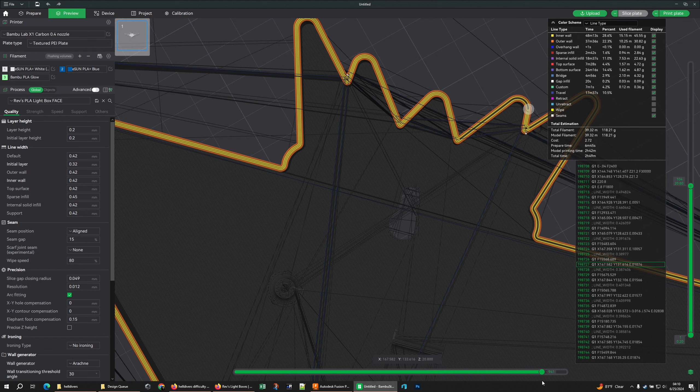It's not that bad. So aside from the inner points here and the outermost two points there, looks like maybe here, yeah, there's a little bit there. That's not bad, that's really not that bad. And I'm using the wrong profile, let's switch that to the base.

Yeah, that looks fine. Kicking that up to the 0.28 layer height. Yeah, that's good, I'm happy with that.

Still got a lot of travel going up to the face here because of that, because it has that one little bit in there. I could round this tip off right here, and that'll make that print a lot cleaner. I'll do that.

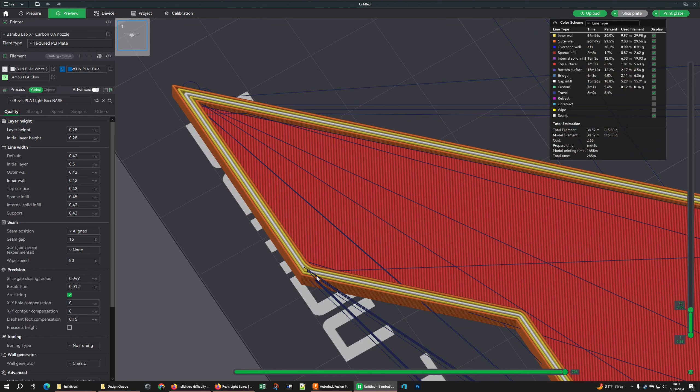Got travel time to those and those. It's okay, actually, there's no travel time there. Oh, because I didn't round that. Nah, it's fine, it's fine. Cool.

So now I can just advance my timeline back forward. I was kind of expecting to get an error there. I don't have that fillet all the way through. Sometimes this happens, I'm going to come back through and edit this and just click OK again. And now it updated that geometry, so now it has those rounded corners. Cool.

Okay, so that's it, that's my base and that's my face. The only other things I could do on this, I don't want to put screws in this. I want to use some retention little bars for this. This is one of my favorite little things that I've started adding to a lot of these.

Let's do one on each side here and then one on each side here. I think that'll push it together just fine. So what I'm going to do, I'm going to create a new analysis or inspect. Where are you? Section analysis.

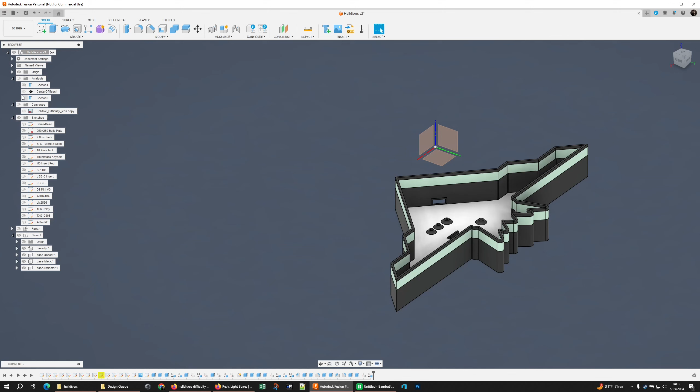And I'm going to use this one and pull it over to there, should be fine. Turn that on. And I'm going to flip it for now so I can see this side. Here we go.

I'm going to create a couple of sketches. First one is going to be this part right here. By creating a sketch, by clicking on that face, I now actually have the geometry of that face available in my sketch. So I'm going to bring up a line.

I'm going to make it a construction line by clicking X. I'm going to find the middle, and I'm going to come down by 2 millimeters. 2 millimeters, 2 millimeters, is that what I want to use? Yeah. No, I want to make that 1 millimeter.

Sorry. Do I? No, 2, I want to make that 2. Sorry, I'm having to think about this, I haven't done this in a while.

And I don't think I have the geometry of this one, do I? I do not, I'll have to project that. So I'll use project and click on that face. Click OK, now I have that line to work with, so I can find the middle of it.

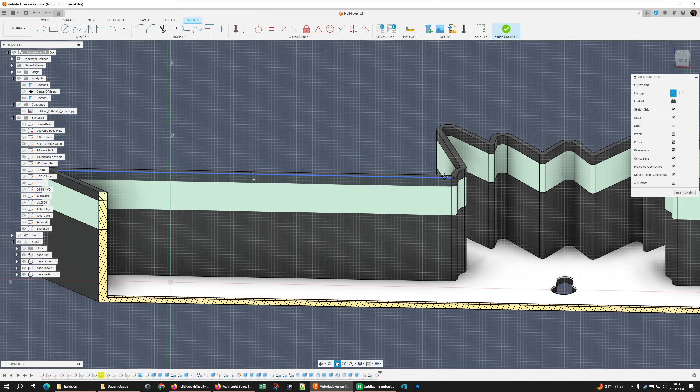Same thing, come down 2. That's just to find the middle points that I want to work with. I'm going to do a center rectangle. I turn off my construction line.

I'm going to make this, yep, wrong one, 2 by 20. I'm going to repeat that on the other side.

Create rectangle center, 2 by 20. And that's what I need in my sketch.

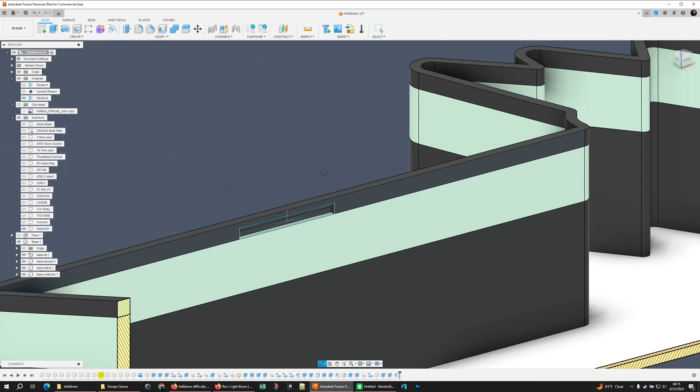From here, I'm going to take that in 1 millimeter on this side, turn my sketch back on, bring this one, same thing, in 1 millimeter. I'm going to bring up my chamfer tool and find that inner edge that it just created. Chamfer by 1. So basically I've just taken a little notch out of this.

I'm now going to switch from my base to my face. And looking at this side, I'm going to grab both of those, extrude out by 1. So now I have these little pieces hanging off of them.

Let me turn sketch off so that's a little bit easier to see. I'm going to hit my chamfer tool again, on that face and that face, by 1. I should get some nice little pyramid shapes.

Then I'm going to fillet the edge of that by like 0.2. Just a little bit, 0.4? 0.4, just enough to round it off. So that's still print friendly. I have no overhangs - it's a 45-degree angle right there.

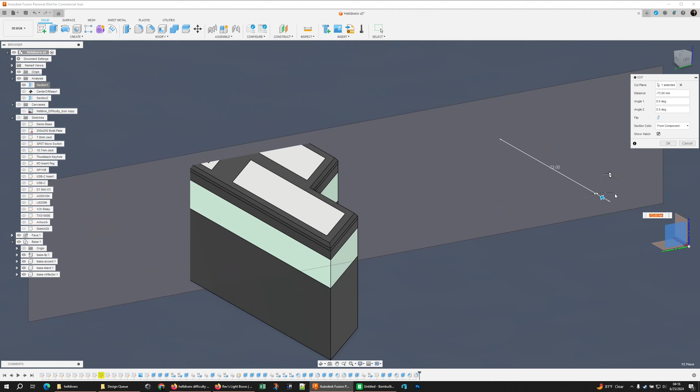And what that will do for me, if I switch to the other analysis view and turn my base back on - where's my base? And we'll edit that view to bring it over to... there we go. So now I have this little connecting lip where when I go to push this down, it'll bend in and that will snap into place.

I've used this exact geometry so many times. It will bend and snap into place, giving me a nice solid connecting anchor to hold this box together.

I'm going to repeat that. Let me flip my section view. I'm going to repeat that process somewhere over here, I think. Yeah, that should push it together nice and neat. So I'm going to turn my face off.

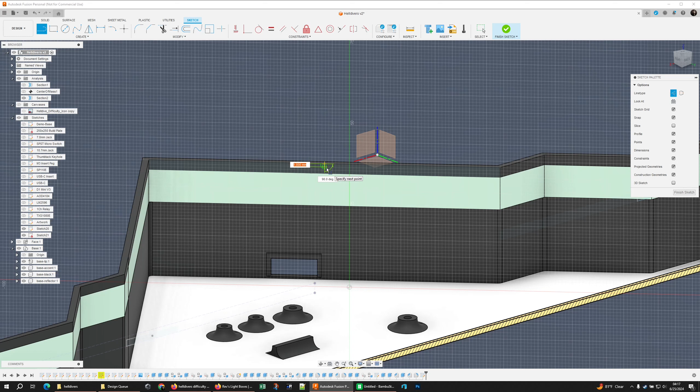I'm going to create a sketch on this one and do the same thing, where I'm going to find the middle of it and give me a 2 millimeter line down. Create my center rectangle, 2 by 20. Finish that one.

Unfortunately, I've got this extra line right here. I don't know why exactly - there's something in my sketch, I didn't fix a line. That's okay, create a sketch on here.

To find that same center point, I'm going to project from there and there. I'm going to draw a construction line between the two of them, then draw another line on the midpoint - that one, because this midpoint is for this piece, and this midpoint is for my line. There we go.

And rectangle, center rectangle, 2 by 20. Okay, so now I have those two sketches - same thing as before.

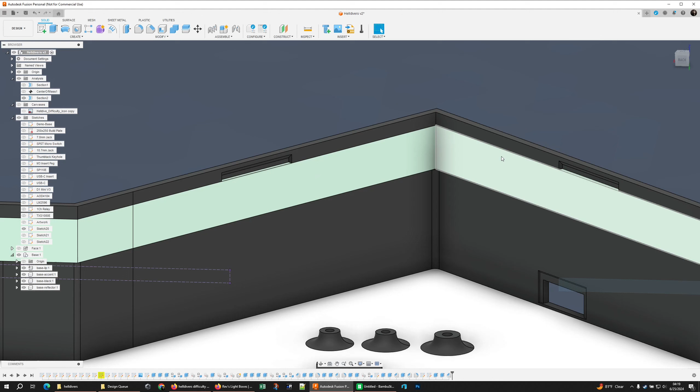Take out a 1 millimeter chunk here and a 1 millimeter chunk there. Chamfer those two so that there's no overhangs and I have a catch.

And then I need to turn those two back on, switch over to my face, repeat the same process. Extrude 1 and extrude 1, same as I did before. Chamfer that and that by 1. Fillet your edges by 0.4.

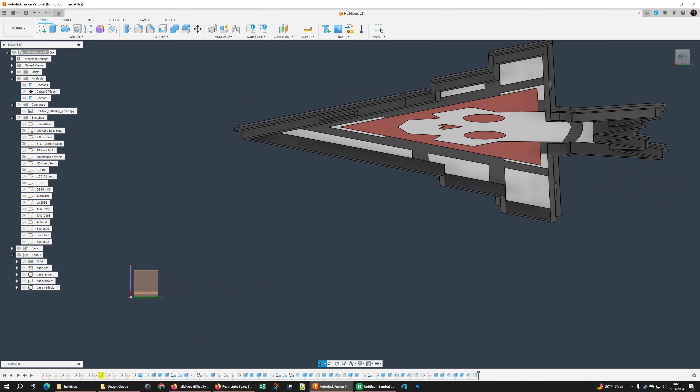Cool. So now on my faceplate, I have anchors to hold this together on the front and the back, so I don't need adhesives, I don't need screws, I don't have to rely on friction fit. That will just snap in and hold it together. On my base, I have corresponding holes for those to clamp into.

Awesome, that's it. I don't think there's anything else I need to do to this other than take some renders and do some exports.

For the exports, a couple different things you can do. I've personally been a fan of doing save as mesh, doing a 3MF with high refinement for the face. Is that necessary? Well, yes and no. If I were to export this as a 3MF, all of my body names will show up.

So face red and face white and all this - whatever my body names are, these should show up in there. That's part of the way 3MF works, it sees those. I know for a fact, because this is how I used to do it, if I had groups of bodies without using components, this is how 3MF works best. I've basically stopped using 3MF though for light boxes - it's not necessary. Step files just work better, in my opinion.

So I will export by clicking on the face itself, Face Helldivers, as a step file. This is like face v2, so I'll throw the v2 in there. I like putting the version numbers on the parts that come out of Fusion just so I can keep track of them - so face v2.

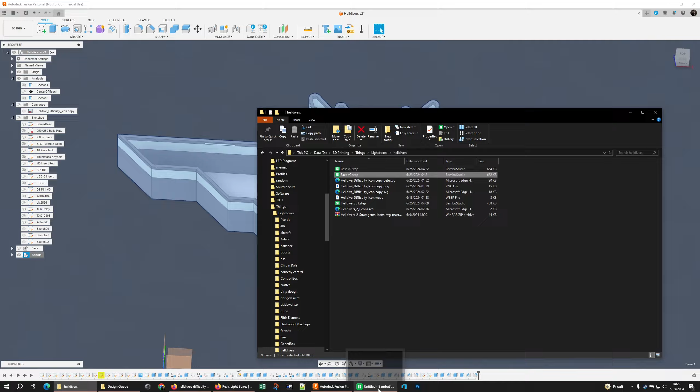If I look to double check, if I create a new one here, let's just delete this. Nope, not design queue - base, face. Looks like they import properly, and I can see the named components on my base, and I can see the colored components of my face.

Perfect. All right, so I'm going to end video 1 right here, and video 2 will get into all the slicer settings and what they are and why they matter.